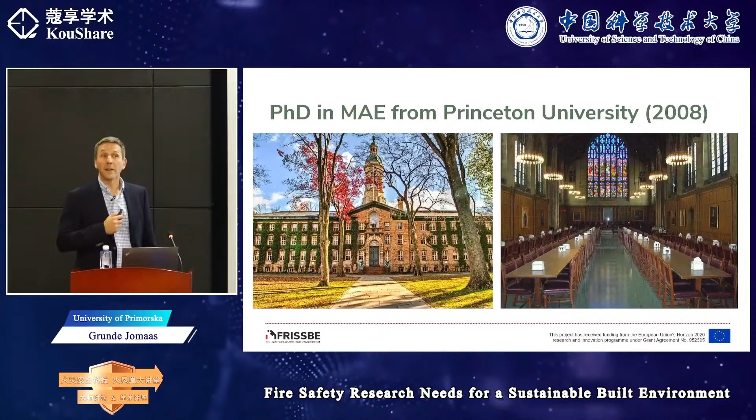So I studied in the United States at the University of Maryland, as he said. Did a PhD in mechanical and aerospace engineering from Princeton University with Professor C.K. Law as my supervisor. At Maryland, I worked for José Torero in the laboratory. Then I did a postdoc at École Centrale in Paris with Sébastien Candel on flame dynamics, combustion instabilities.

I wasn't there very long because I got a faculty position at DTU in Copenhagen, where I was for 7 years. With a short sabbatical, I went to University of Queensland for 8 months. And then I was a professor at the University of Edinburgh in 2016. And now, since 2021, I've been the ERA chair for the FRISSBE project.

And just to give you a little bit of context, the FRISSBE project is not a research project. It is a capacity building and widening project. So the goal is to collaborate, to enhance the skills of people, with a focus not on photovoltaics, not on mass timber, not on a specific topic, but in general to create people to be better scientists, to be better at applying for funding, carrying out research, writing papers, disseminating. So I'm leading the team there.

So as you can see, for the project, it's a 5-year project. And I started just at the end of 2021, and they will run until 2026. And it's almost like what they call seed venture capital. So the goal is that the European Union gave money for us then to be self-sustained afterwards. So we build up a group, and then with 5 years of funding, we should be able to create our own funding and our own opportunities.

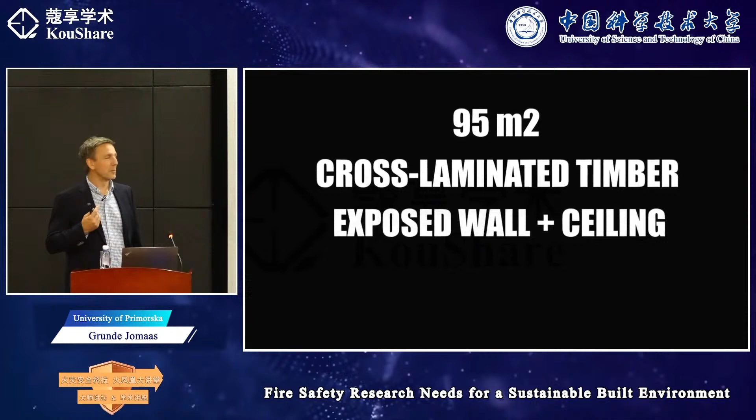And then, let me see here with the sound. So that led to a ban of combustible materials, but now because of sustainability drivers, let me see if it's too loud.

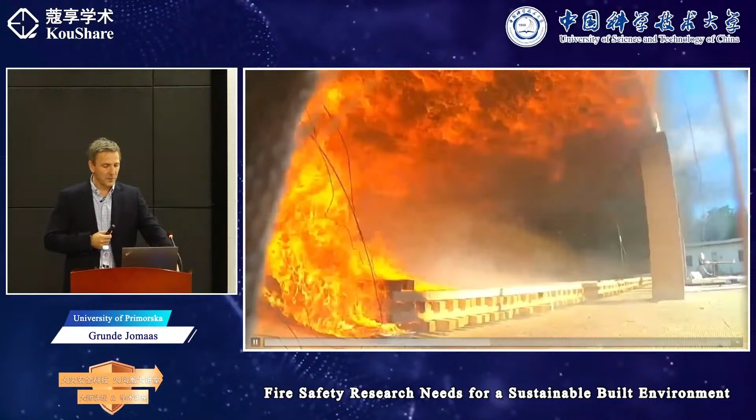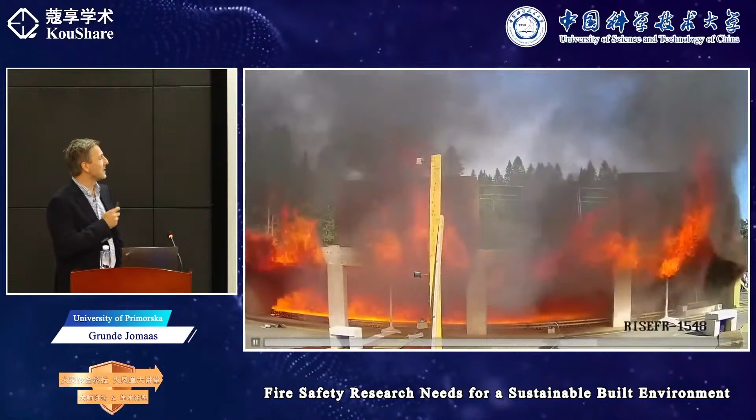Fire, mass timber is becoming very much used again. This is from experiments done in Trondheim at the Rise Fire Research Laboratory, where a PhD student was doing this large test. The room is almost 20 meters. When they did a fuel load on both the floor level and the ceiling level, with walls fully compartmentalized with wood, they started the fire on one end, and it took about 5 seconds to flash over and travel the 20 meters. This is, of course, very difficult for firefighters, and different from what we expect in a compartment fire.

So basically, if we start with a big fire in London, we created new laws, new regulations for fire safety, and we learned many things over now 350 years. But then in the 60s came requirements and demands for energy efficiency—there was a fuel crisis. So then new materials, plastic materials, entered buildings, and we had a need for new regulations.

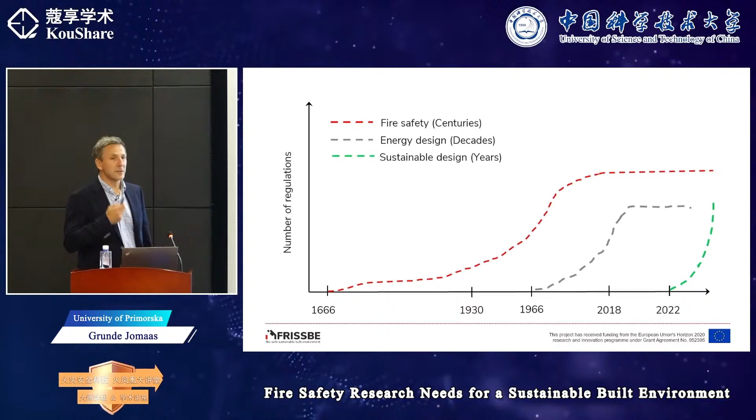And then, of course, we had the big fire in 2017 related to Grenfell, which came as a result of this energy renovation push. And now, with sustainability, the drivers are so quick that we have to address things on a yearly basis. We did things on centuries for fire safety, then tens of years for energy renovation, and now with sustainability things are going so fast. Fire safety regulation may take 5 to 10 years to implement, whereas the problems are introduced on a yearly level or even faster. So that creates a big problem.

If we want to be sustainable, a definition from 1987 from former Prime Minister of Norway Gro Harlem Brundtland, in a commission for the United Nations, states that sustainability consists of fulfilling the needs of current generations without compromising the needs of future generations, while ensuring balance between economic growth, environmental care, and social well-being. So it's not just one aspect you have to look at—you have to look at three aspects.

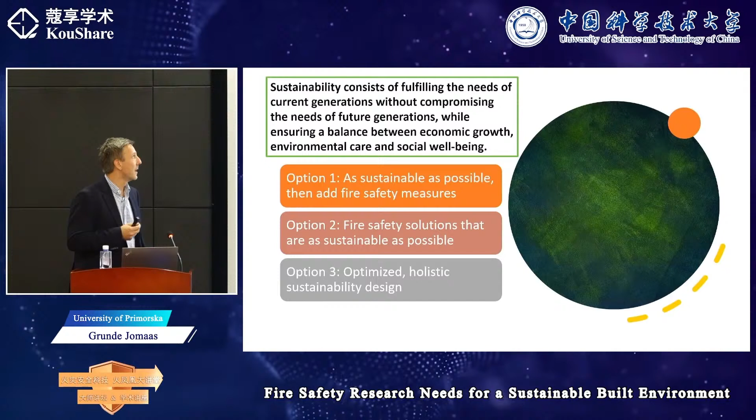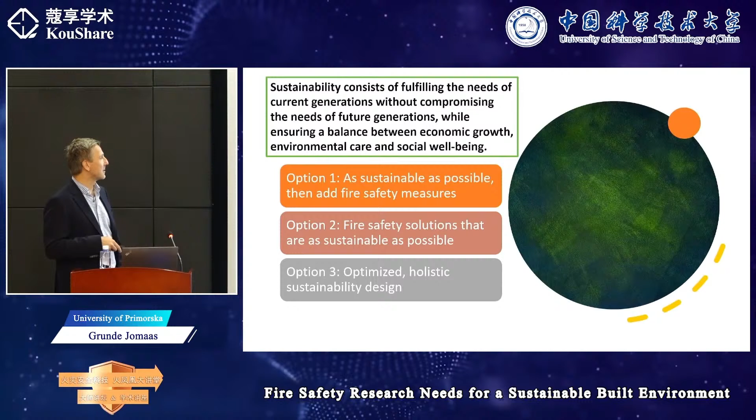When it comes to fire safety, you could think there are maybe three options. One is to build a building as sustainable as possible and then add fire safety measures, which is actually often what is done because the sustainability drivers are so strong on a political level. Option two is fire safety solutions that are as sustainable as possible—we see this now with water mist versus sprinklers, which is more sustainable, which should be chosen for a given building. But in my view, the ideal goal is an optimized holistic sustainability design, and this requires research.

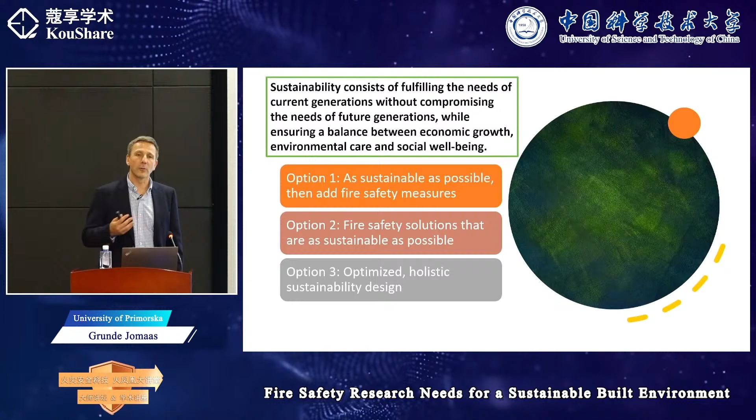We need to understand the many complex factors that go together to build this combined approach. Just to remind you, this happens in many places—this was in Valencia last year. People think we had Grenfell and then we learn and we know, but then you had a fire in Valencia where, following the timeline, in just about half an hour it not only spread to the whole building but also ignited a neighboring building in that short time frame. So the problems are here, they're here now, and they're everywhere.

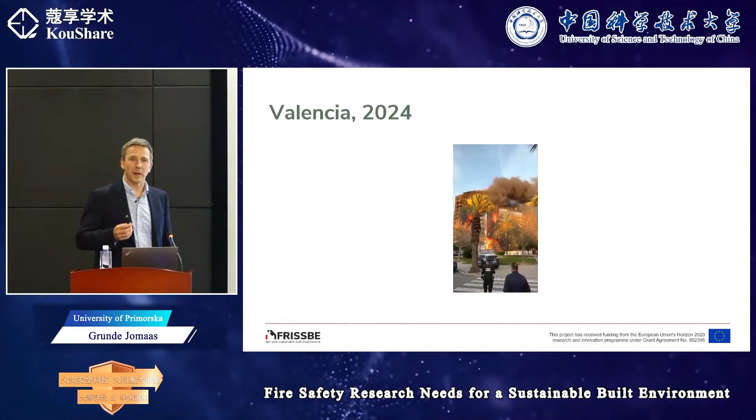So basically, fire safety research has become essential for Europe, for the world, to reach the goals set forward with respect to energy, climate, transport, and sustainability. Innovation leads to risk—this is normal. But at some point this risk becomes too big, and intervention is needed. And this is now. So we need to ensure that innovative solutions are safe. Performance-based design is a necessity because prescriptive solutions are not created with sustainability in mind.

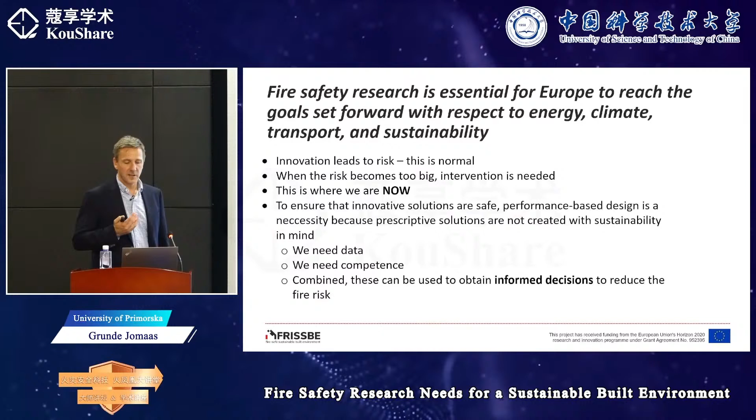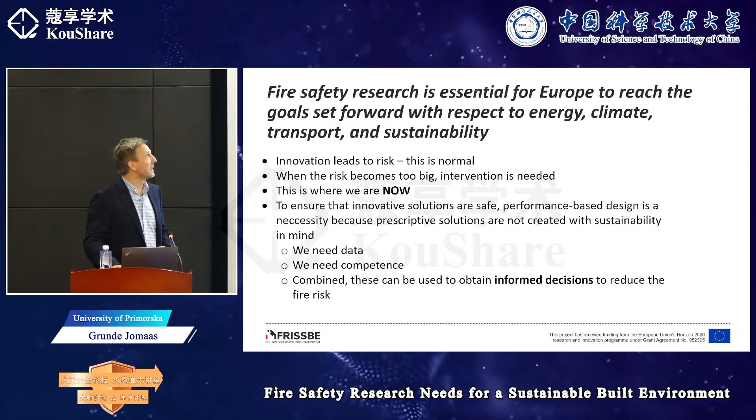So we need data, we need competence, and we need to combine them to make informed decisions to reduce fire risk. So informed decisions based on true facts and research. And to show that this is throughout, I borrowed this slide with permission from Wojciech. So I kept his ITB logo. He gave this talk just a few weeks ago in Zurich.

And he shows that if you look at the built environment, the fire safety research needs are everywhere. Whether it's energy generation, distribution, and storage, 3D printing of buildings, ventilated and green facade systems, electromobility, infrastructure, future mass transit, mass timber, and decarbonization. It's in the entire built environment that we have new innovative solutions being brought forward at a pace that it's difficult for safety to be included at the same time.

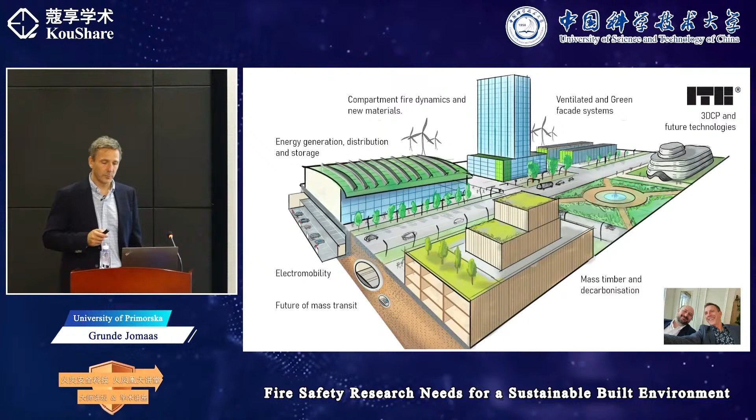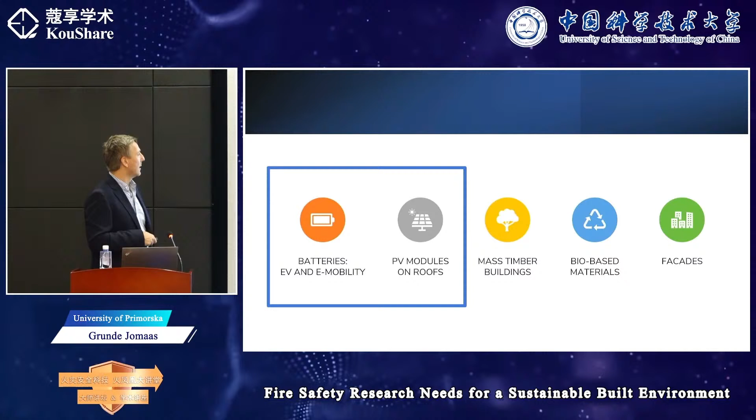So I could have talked about many other things, mass timber, bio-based materials and facades as well. But to go a little more in depth, I focus here on batteries in terms of EV and e-mobility, and also on PV modules on roofs. For both of them, it's kind of similar. You want to know about the ignition, the fire dynamics, how it interacts with the structure or the compartmentation, and you need to take into account the firefighting. And of course, from a sustainability point of view, you need to know what the environmental impact is of all of this.

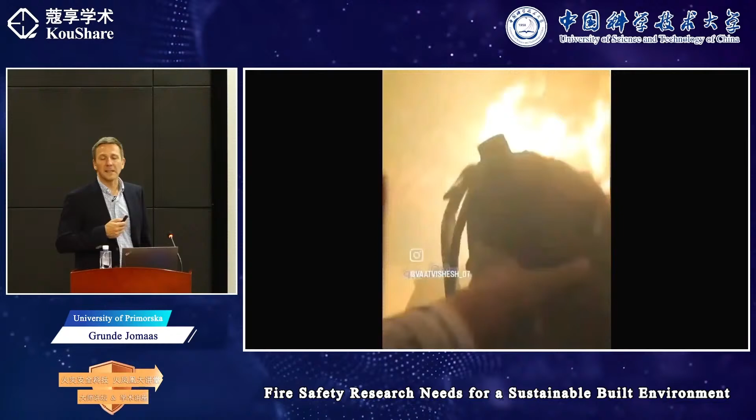And in terms of batteries and e-mobility, the problem is bigger on the smaller level than it is on electric vehicles, because you also have proximity to people. The speed with which you reach a 1 megawatt fire, say a flashover, is very fast, and it's very unpredictable. Cooking fires are one of the main causes of fire, but that happens when somebody is doing something, though people can fall asleep and so on. But battery fires very often happen when people are sleeping, not expecting it. The device is not technically seen to be active.

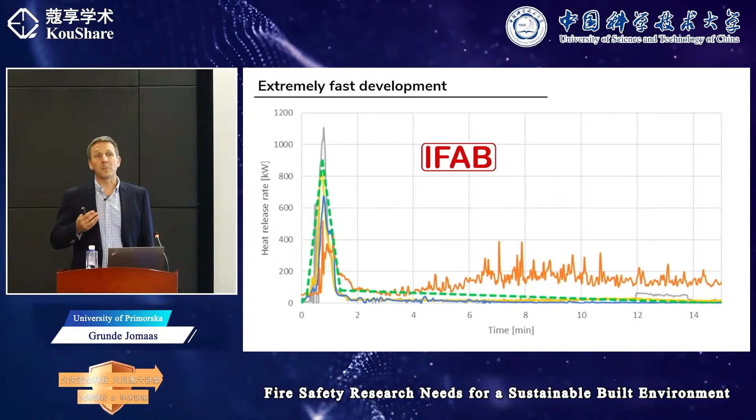So if you look at some of the research that's been done for batteries, like an e-scooter, you can see that it can reach 1 megawatt in less than a minute. And from classic fire science, an ultra-fast fire takes 75 seconds to reach 1 megawatt. That's based on a liquid pool, an arson scenario. So these fires reach that size even faster than a liquid fuel.

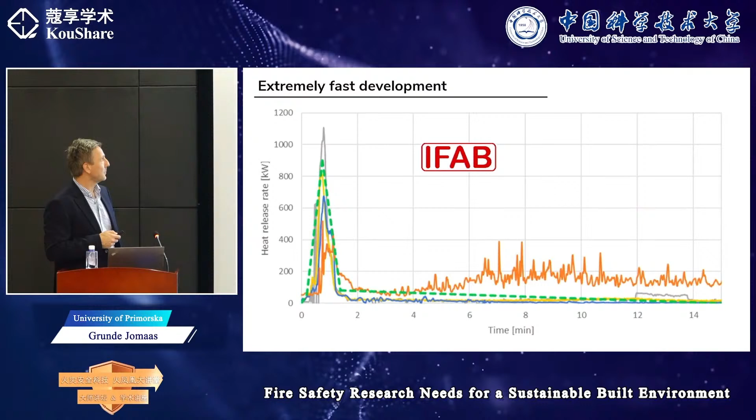But not only that, there's also very fast development of, for example, hydrogen fluoride. These are some tests we did in our laboratory, where you could get values that are 10 times lethal in a very, very short time. And I think this was the case in the battery factory fire in Korea, where 23 people lost their lives. They went to fight the fire, thought they were going to approach it, and then because of the toxicity, succumbed to the fire. So there's also a need for education, for people to know that they need to just leave instead of trying to fight the fires.

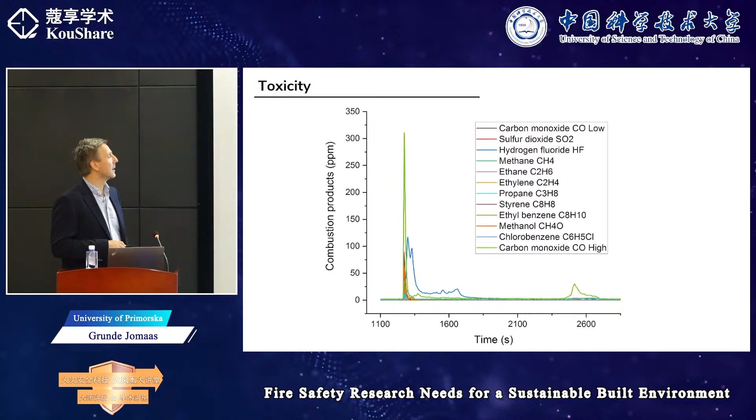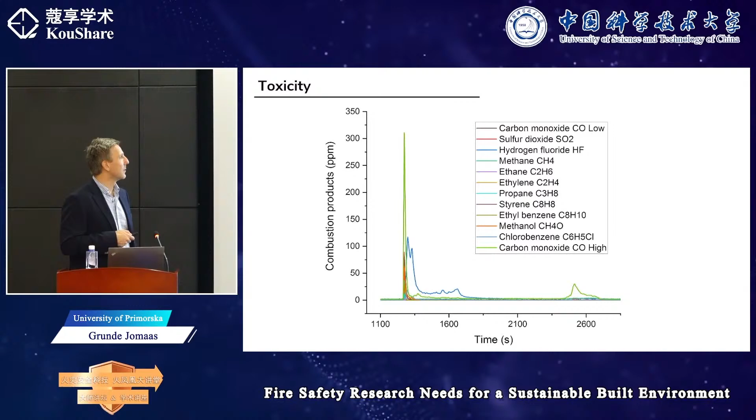In New York and in Vancouver, it was the leading cause of death in the past years. Now they've made several regulations to improve that, but it's a very important problem. So in terms of sustainability, we often have a very nice utopia. But no matter how good a utopia you create, if your dystopia is bad enough, it does not matter.

So this is from a bus fire in Paris, an electric bus. And because of this, and the same in London, the fires they experienced led to a ban. So you do all the development, then you have one fire, and you end up with a ban, and all the hundreds of buses of the electric fleet are just put in a parking lot. And that's not an informed decision. That's what they refer to as a knee-jerk reaction, where people say, oh, we don't know what to do with it, so we just put it away. We don't want to deal with it. We don't allow it. And that's not a good solution either.

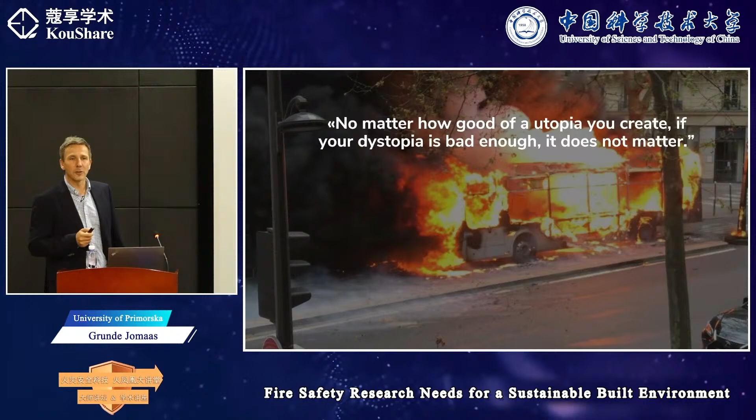So in terms of car parks, I think, for electric vehicles, the most interesting part will obviously be car parks, because with a car fire on the street, most often people are able to get out. If it's involved in a crash, it could be different. But in general, if a car is in the open, people can get out of the vehicle and it can burn out. But in car parks, we've seen over the last few years, many car parks have collapsed.

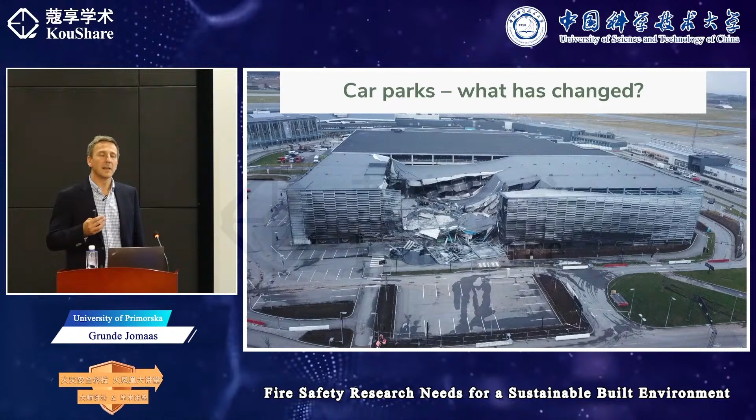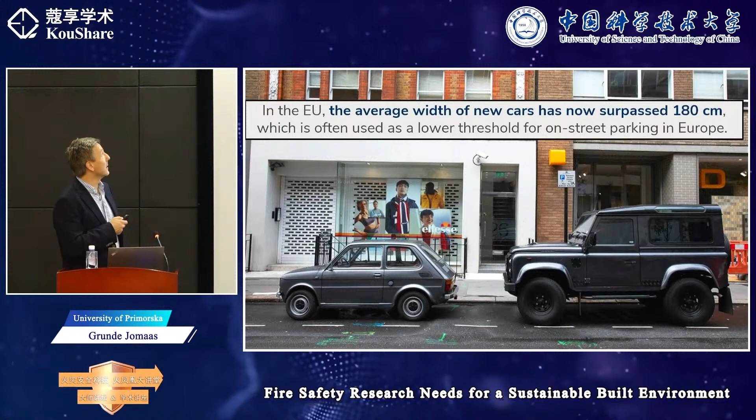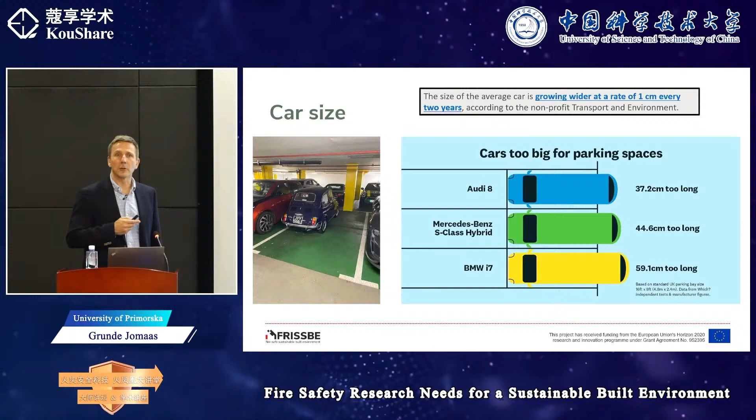And this is a combination of wanting to build leaner buildings, and it's not related to EVs. The biggest problem is actually the size of the cars. You can see in the EU, the average width of new cars has now surpassed 180 centimeters, which is often used as a lower threshold for on-street parking in Europe. And if you put it in a parking garage that was designed for something like this, you see that the other cars fill it, and the cars are much closer, which leads to a bigger fire.

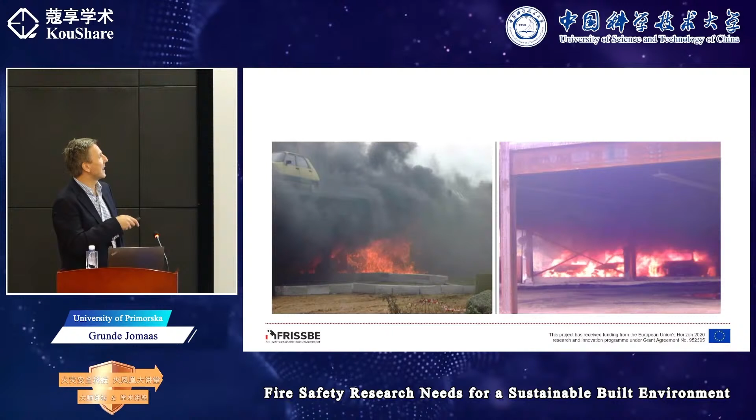This is research done in Europe in the 90s, and this was what they perceived as an open car park, and they had 3 cars. It was always assumed that you would only have 3 cars burning as the fire scenario. That's the design fire. And you can see here it's open, it's right on the edge. If you look at the fire, a lot of the energy is going outside of the car park, not staying inside.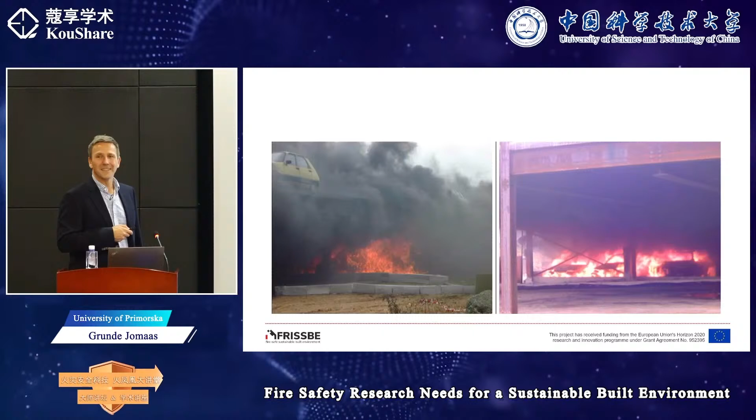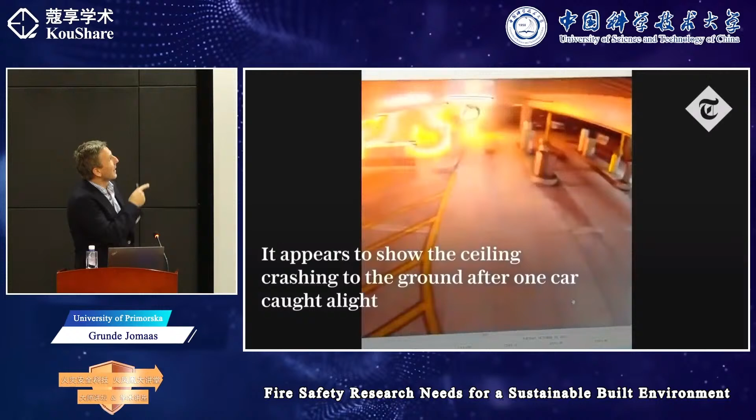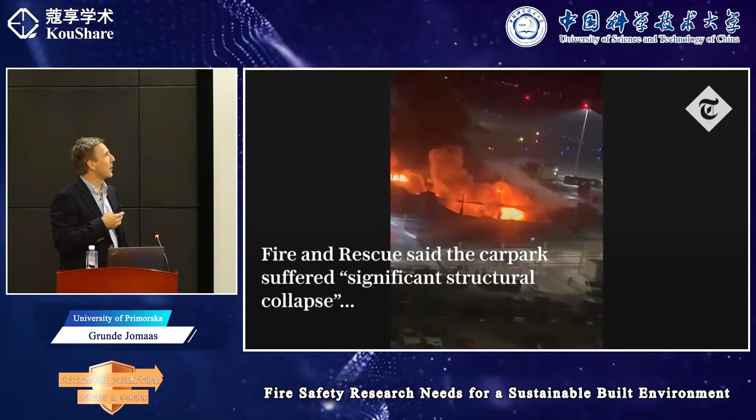And then we end up with something like this, which was Luton Airport outside of London, where you can see a fire was so big that the deck went. And if you think from a firefighter perspective, with the car coming through the deck, it may look like they could enter the building, but they had to fight the fire from the outside. And the aftermath looked like this.

This was starting in a car. It was not an EV. And the driver drove into the car park, and he didn't realize. There were CCTV cameras showing that there was smoke coming from his engine. And he was in a rush, so he was driving, and he parked. He didn't even park next to other cars. He parked actually in the driving lane. And he tried to use 2 fire extinguishers to extinguish it.

Didn't manage. And even in a place where people can call the fire service with cell phones, it brought down the entire structure. The fire service could not get in. By the time the fire service got in, you could see from the body cams of the firefighters walking in the stairwells that there was cracking in the walls already. So they withdrew, and rightly so, because it led to a collapse and hundreds, if not 1,000 cars being involved.

What is particular for EVs though is that you have the vapor cloud explosion, and you have an ignition with a jet-like flame underneath, which will lead to the fire spreading to other cars. Many people are saying that if the gas tank were to burn, it would also lead to that. But the gas tank is not as often involved in a fire as the battery is in an electric vehicle. So there are new challenges, but the main part is that when cars are parked very close by, they can ignite each other. And of course, cars these days are predominantly plastic outside instead of metal.

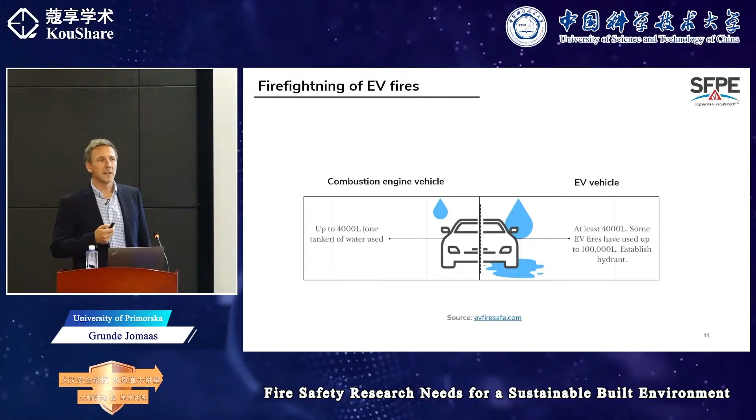So the key here is that there's some new challenges. They're not necessarily larger, but they're different. So we need to understand them, we need to research them, we need to inform the firefighters, we need to work on the technology and get different stakeholders involved. And then, of course, you have things like this.

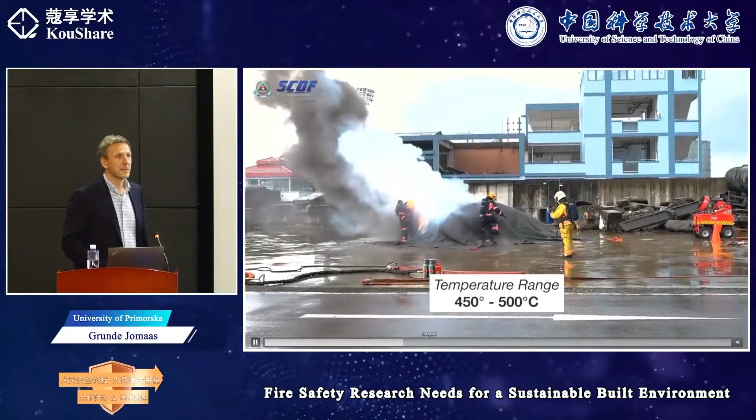So some of the research related to electric fires is with fire blankets. And just recently, the Fire Safety Research Institute from UL issued that firefighters need to be very careful when using a fire blanket, because you can accumulate gases and you can have an explosion afterwards. And I know from tests like this, that's sort of a promotional video, that lifting of the blanket will introduce oxygen and may cause a backdraft.

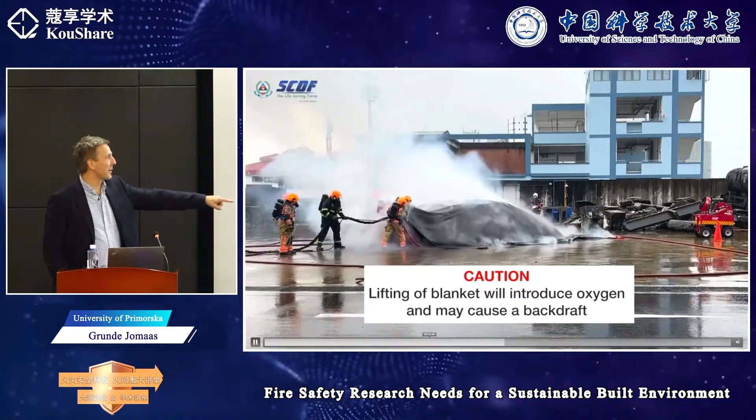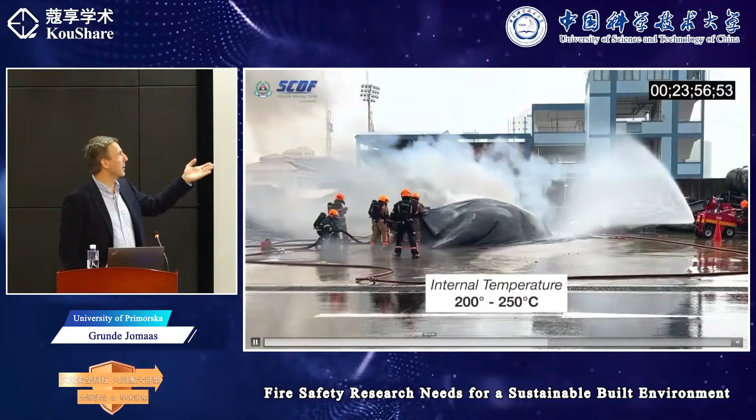So they say they've included this. It's not shown in the video, but obviously they must have done some experiments where this actually happened. They don't want to show it, but they probably saw in some experiments that they did in Singapore the same as UL saw in their research.

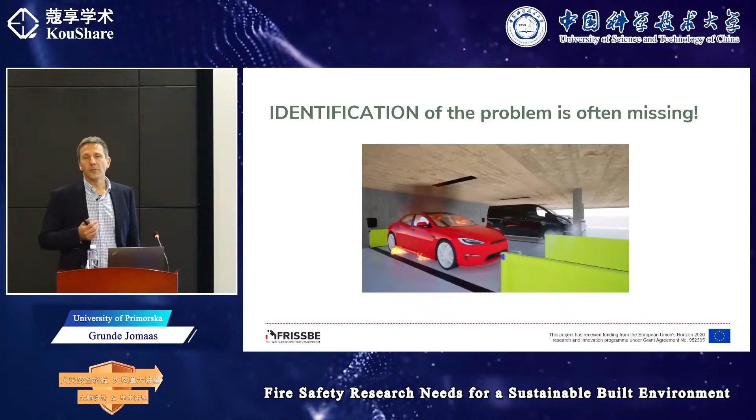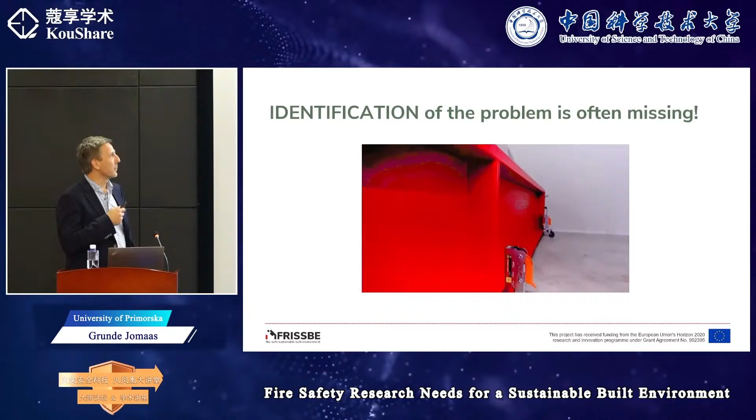And the challenge with this is that often the identification of the problem is missing. So when there's many new problems, there will also be many of what is referred to as a solution looking for a problem. People haven't understood the problem, because, to me at least, the challenge with this is, yes, it may work, you can fill it up and you can fill the car, but how are you going to have that for every car in the parking garage?

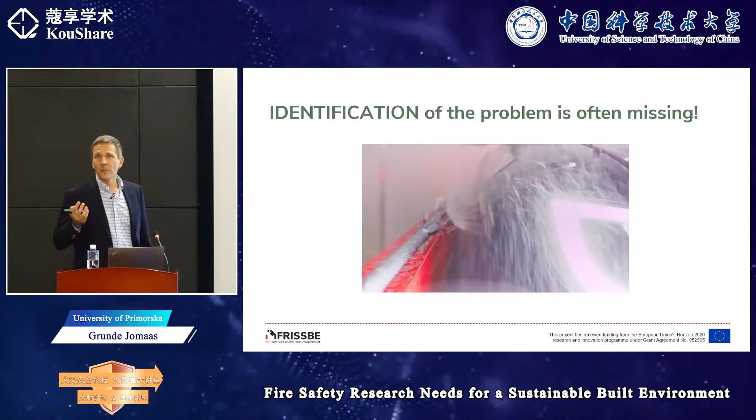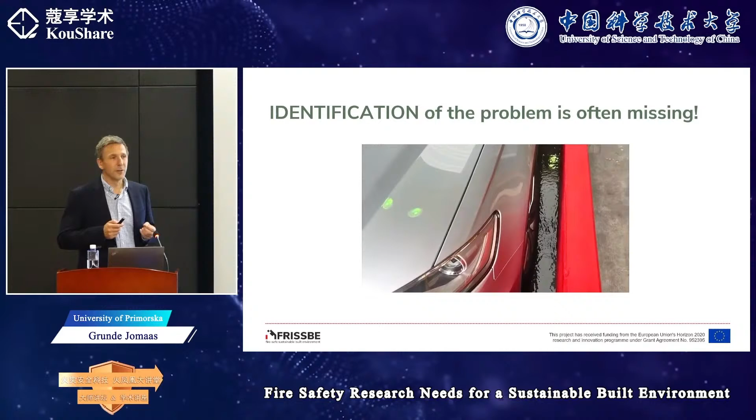Or some people say, oh, we can move it to the car that's burning. But keep in mind that in London, in Stavanger, in Liverpool, the problem was the firefighters couldn't get to the fire even with the hose. So how are they going to get to the fire with this? If they could get there with a hose, they would do so. But in those fires, they didn't get there in time. So we need a better solution.

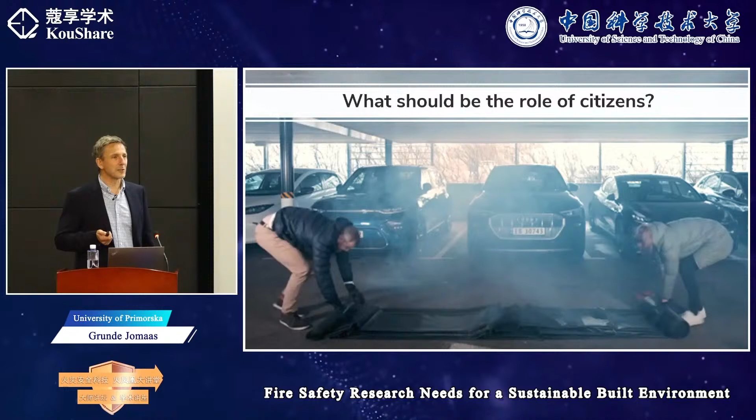And then also with fire blankets, people say, oh, well, then the people can do this. But should we expect the regular citizen to be the firefighters? I don't think so, also having talked about the toxicity and the problems that we can have. It's important to acknowledge that it's better to leave it for the firefighters, but also to come up with solutions that don't have to involve citizens and rather keep them safe.

So the second part that I'm going to talk about is photovoltaics. In Europe, they have something called REPowerEU as part of the Energy Performance of Buildings Directive, and by 2030 there's going to be more or less PV on all buildings on the roofs. And what I like to emphasize is that all buildings means hospitals, it means nursing homes, it means museums,

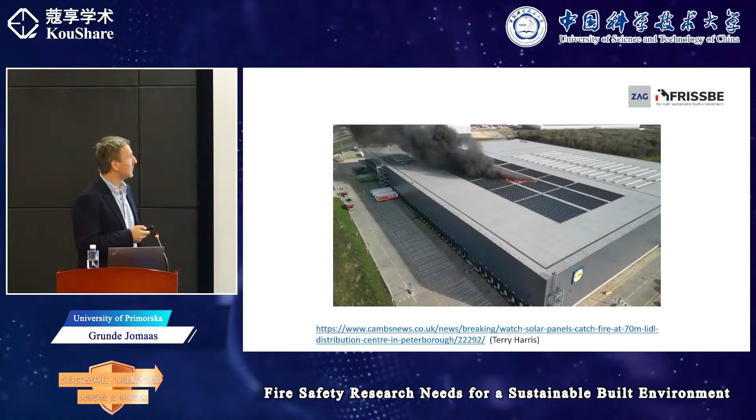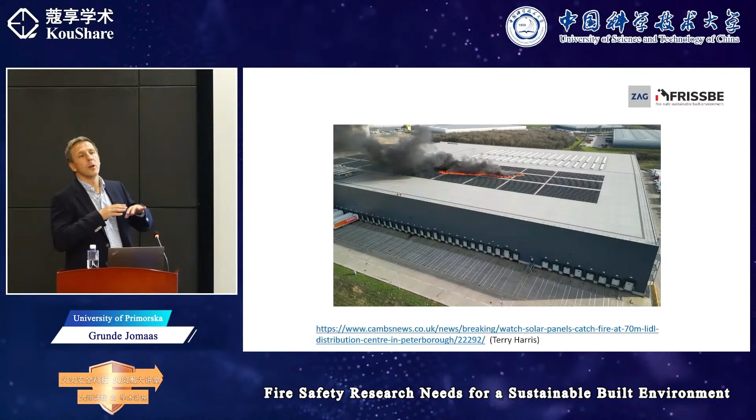However, I didn't show this, but this was a new build, and it managed to survive the fire. Other buildings have not been as well protected, so you need to know the solution both for separation distances, but also for what kind of materials you're going to use.

So at ZAG we created a fire safety guideline for building applied photovoltaic systems on flat roofs. And we're working now with the group here at USTC to make also a translation into Chinese, because we find that it's important to share this sort of basic knowledge information with everyone. It's not an installation guide, it's practical, common sense things that people should be aware of.

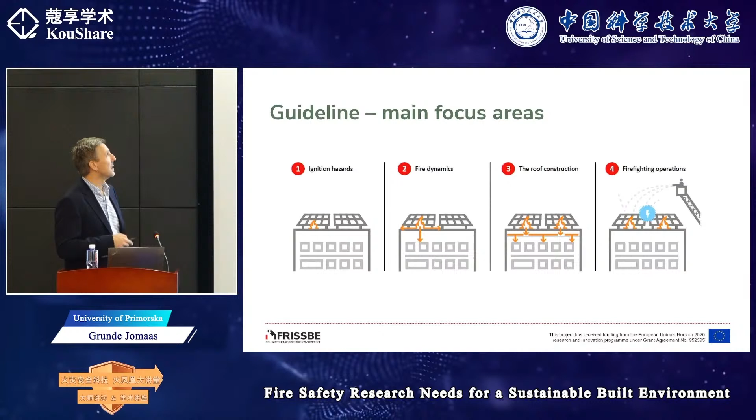And similar, as I showed with the batteries, we look at the ignitions, fire dynamics, the roof construction, and then firefighting operations. And the goal is to avoid large consequences of a PV fire on roof, and that could be by minimizing ignition frequency and power, or minimize the fire spread rate and extent.

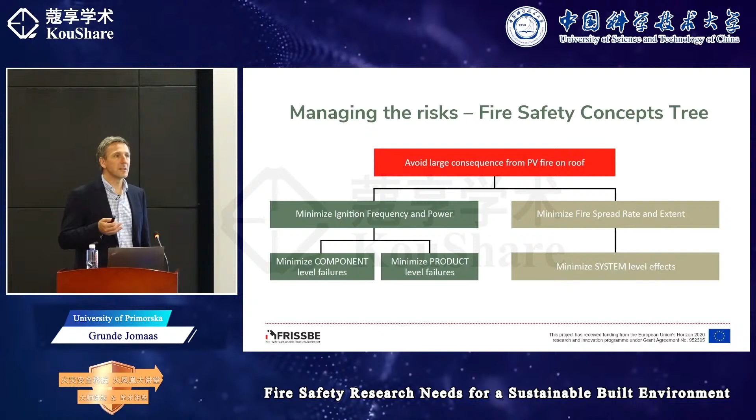So this is component and product level, and there's a lot of codes and regulations and tests for components, for the cables, for the photovoltaic panel itself, but very little or nothing on the system when you put it on the roof, which is the real problem. Because we test the roof and we approve the roof without photovoltaics, and then when we put the photovoltaics on the roof, it changes the fire dynamics, and the fire can spread, it becomes bigger.

In terms of the fire, we can look at two main scenarios. It could be a fire that spreads on the roof, and then we want to protect it from coming to the building. So the fire dynamics, but also looking at the roof construction, what we need to protect it. And there can be also problems with fires starting inside the building involving photovoltaics.

This is from a fire in Norway. It led to initial 20 million euros loss, but now it's more than double of that, because they needed to change all of their distribution logistics for all of Norway, Sweden, Denmark, based on this fire. This fire started in a truck charging inside the building.

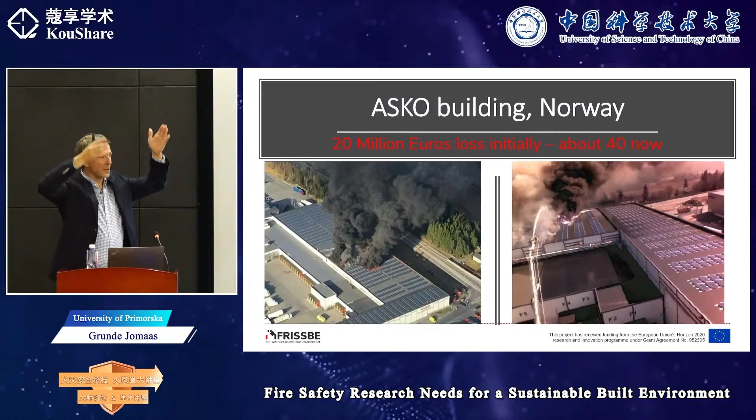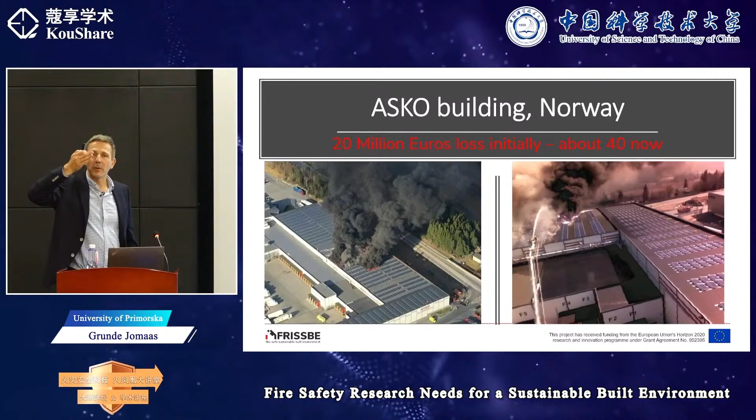It went up to the roof, and nobody thought that the fire would spread on the roof, because if you have a regular roof without photovoltaics, the energy would just go up and it would go outside. But with the photovoltaics, now it spread laterally, and it spread so that it involved two sections. They didn't have a parapet, they didn't have the fire break to go above the roof level. So they ended up with a very, very big fire, 9,000 square meter damage.

They needed to use wildfire type of helicopters with big pods of water to extinguish it. So there were also concerns of the environmental damage with the leakage of contaminated water to streams and nearby areas.

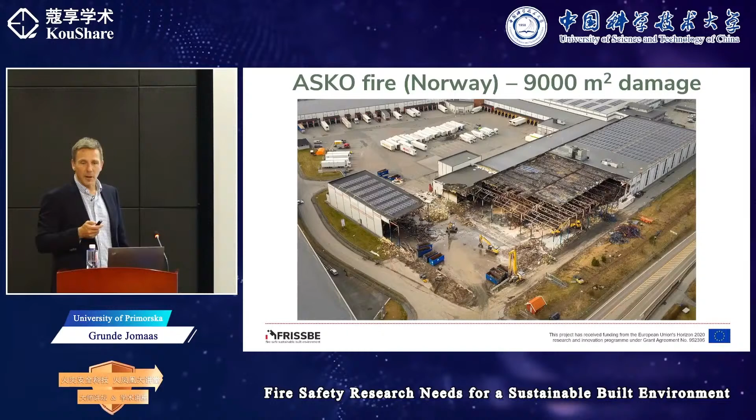And is it a problem? People often ask, and I ask also Yu Wang and some of the students when it comes to BIPV, because for BAPV, we have some numbers that there are maybe expected something like 29 fires per gigawatt. For the conference in Slovenia, my PhD student looked in Italy and Slovenia very closely, and the numbers are pretty much the same. In Slovenia, actually almost 40 for the last 2 years. So it does happen quite regularly.

Of course, not all of these fires become big, but that's what we want. It's okay, we can't prevent somebody from dropping a match or some electrical fault to happen, but we want it not to necessarily make it to the news. We don't need a big fire.

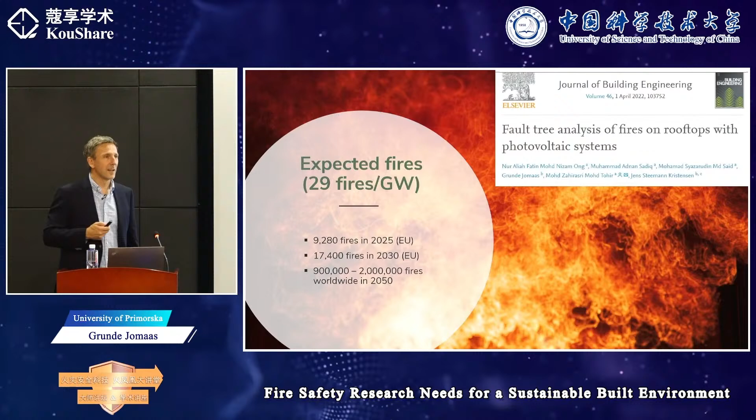So the problem is that it changes the fire dynamics, and this is some work by a former PhD student, Jens Steemann Kristensen, who's now at DBI in Denmark. Here, there's just a PMMA plate. There's nothing above it. So it burns like this. So take a note, this is 20 minutes. And then it's 50, 80. So it's just regular flame spread.

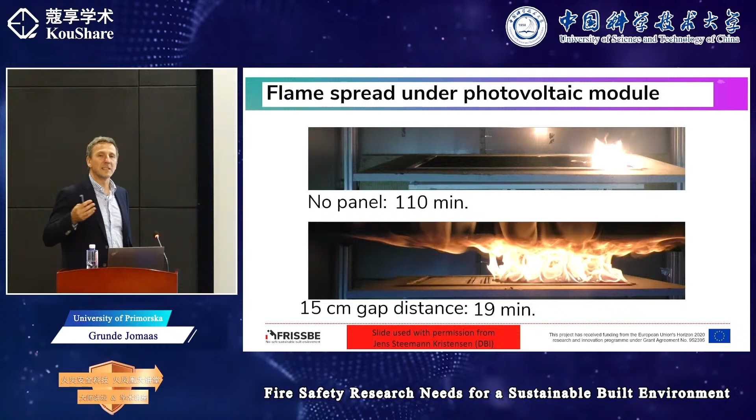But then we put not even a photovoltaic panel on top, just a metal plate. We did also with a photovoltaic, and the results are pretty much the same. And 15 centimeters above it, 10 minutes, and this is 20 minutes. Remember at 20 minutes, the flame was just about this size. Now it's spread, and you can see it consumed all of the materials and a much bigger fire that will then very easily spread to other places.

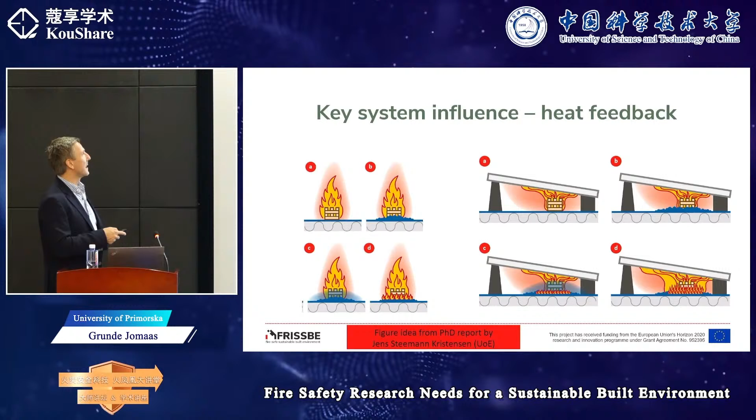So the basic premise for most roof construction is that if you have a fire, it will just burn like this, and you have some flame retardants in the membrane, and you have a type of insulation that has been tested for this type of scenario. But when we put the photovoltaics, we change that and we get the flame spread.

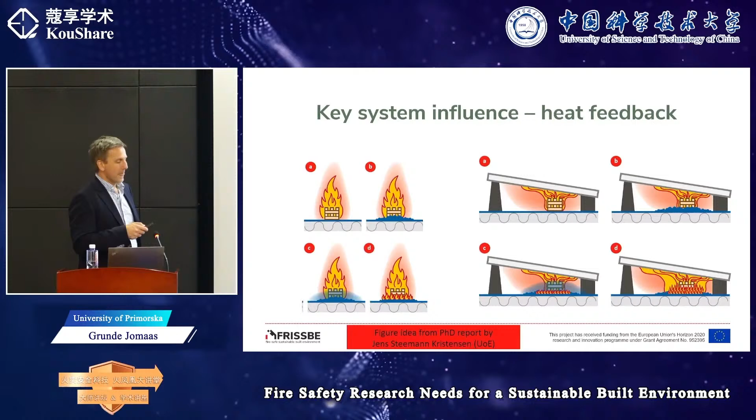So in our lab, we've done quite a lot of testing. We've also done testing with arcing. Because some people say, oh, well, you use a wood crib, why do you use a wood crib? Well, we use a wood crib because it's more repeatable, and it actually just captures the fire at a slightly later stage than the arcing.

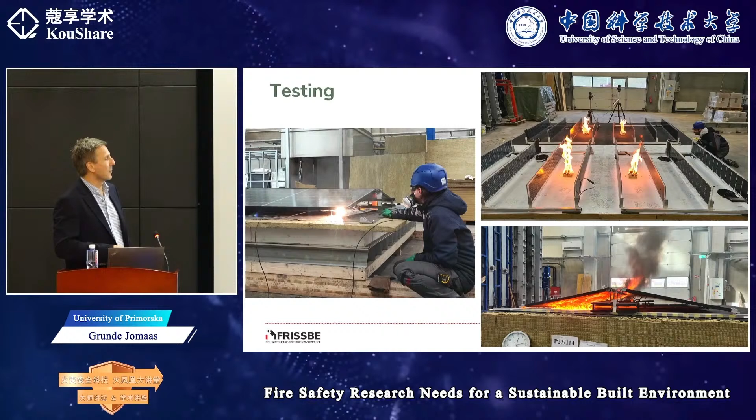We've also done testing just to show the geometry. So if you have upward panels, it's like you don't have any panels, so it doesn't influence the fire spread. But then we have here with panels, and the same crib here leads to a bigger fire that will look maybe something like this after 10-15 minutes.

So this, even with something like 4 panels, this is 4 by 4 meters, so we're burning maybe 10 square meters of roofing membrane, and this could be a 2 to 3 megawatt fire, starting from a 15 kilowatt small wood crib or from arcing.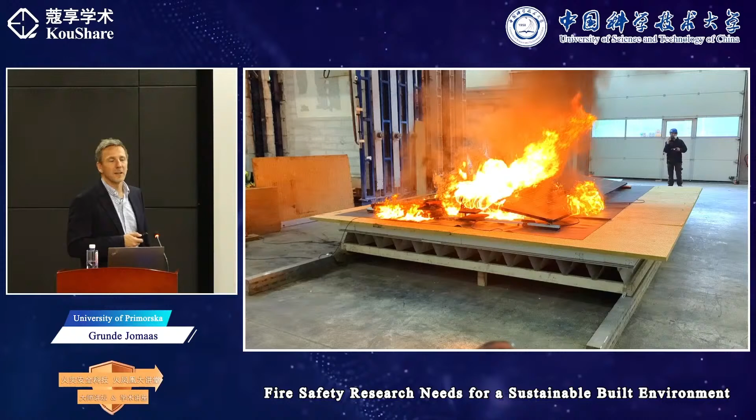So to demonstrate also the different solutions, we showed them simultaneously. This is a roof construction with just bitumen directly on EPS. Here we have a mitigation layer, so here we have a mineral wool between, and this is a build-up with EPS, a bitumen, then a mineral wool, and then bitumen again. And we showed the difference with the 2 different panel configurations.

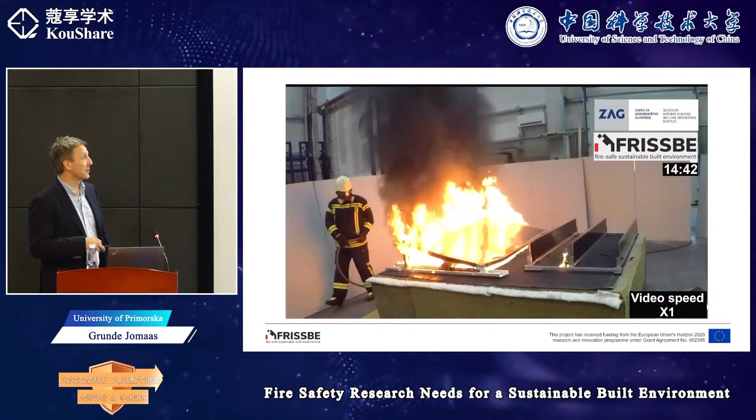So a bit later, you can see that if you have a mitigation layer, the fire will stay local. If you don't have a mitigation layer, it can burn through and engage and burn the combustible insulation. And if you have a photovoltaic like this, it becomes quite a large fire compared to this. This was the same starting point, right? So you can clearly see that the photovoltaic is the one that enhances the flame spread and leads to the bigger consequences.

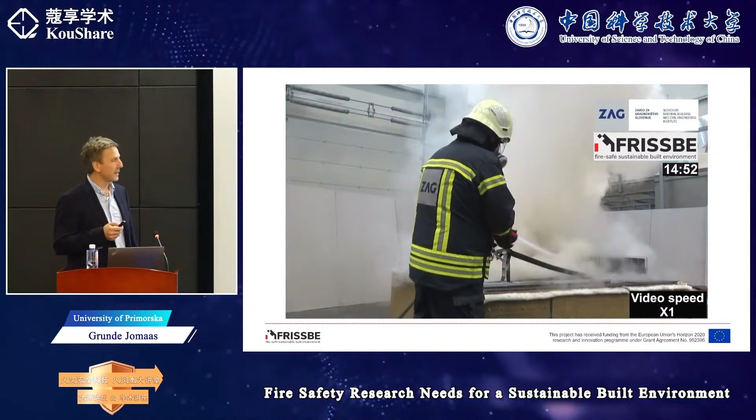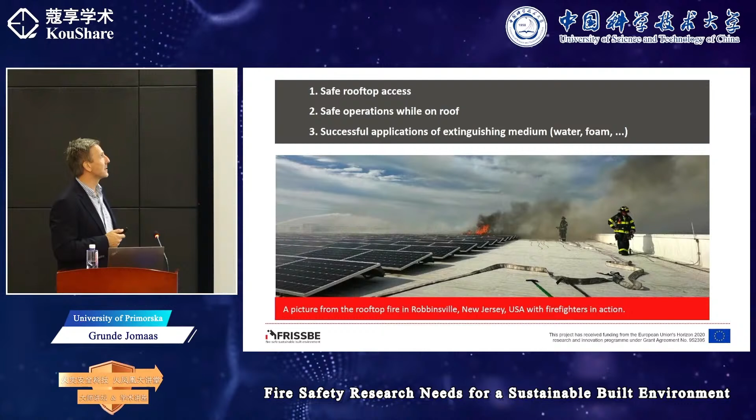In terms of firefighting operations, some of the key things are safe rooftop access. You can sometimes see that people put the photovoltaics all the way to the edge of the building, so then it's impossible for the firefighters to access. There's also certain sizes you want to have so the firefighters can reach across, because they can only spray maybe 40-45 meters. So if you make it just an endless array of photovoltaics, they will not be able to reach where the fire is. And then, of course, you need to take care of their safety and also what is a good fire extinguishing medium. So we've just collected from other people what sizes.

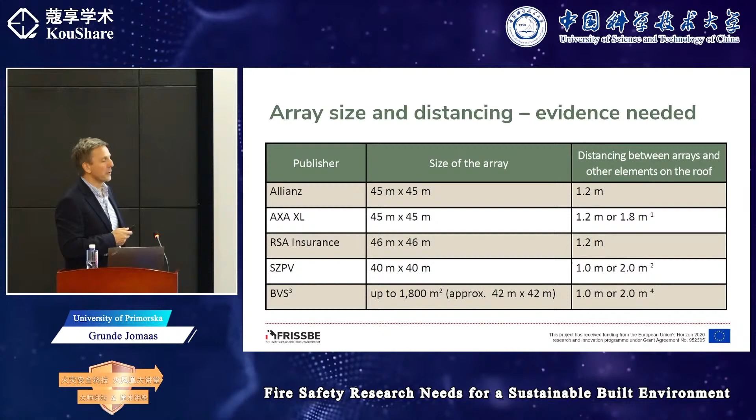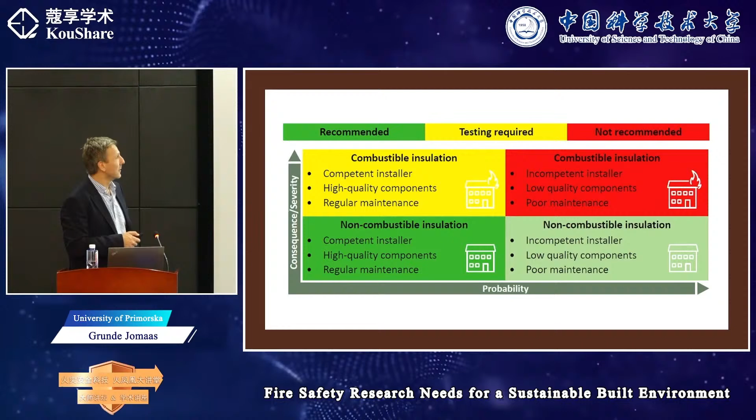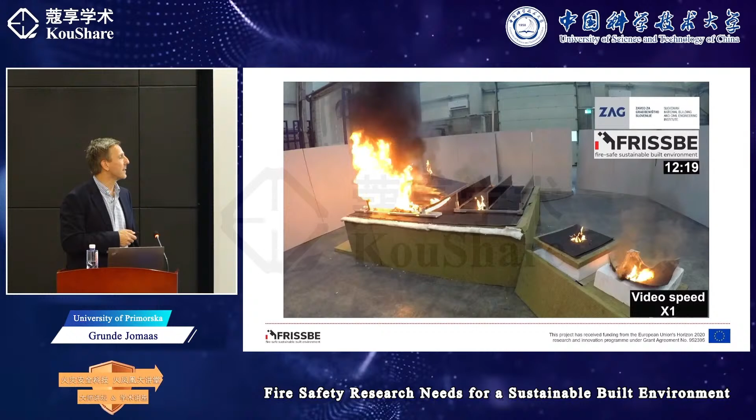And then the challenge for combustible insulation is that combustible insulation is not all the same. That's a wide range. It can be from a very, very flammable material to a thermoset, highly flame retardant material that may have quite good fire performance. We recommend for all solutions that they are tested, but what we refer to in the guideline as combustible insulation is, if I go back, particularly a setup like this with EPS, a very flammable, lightweight insulation material.

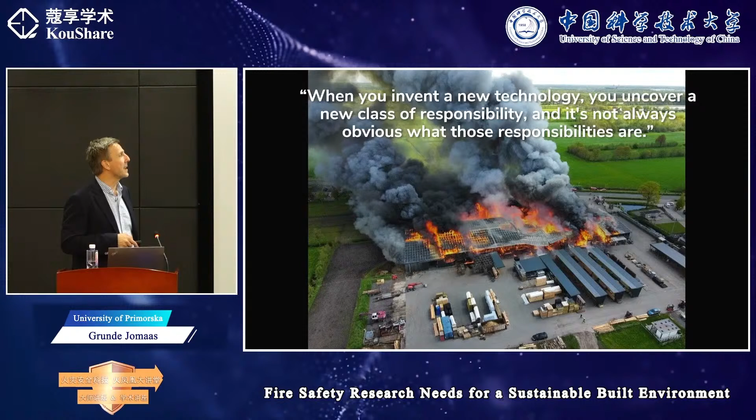So this was not a fire in the photovoltaics as such, but they were involved, they were on the building. And they found in fields as far as 3 kilometers away, where kids were playing, where animals were feeding, pieces of glass that had been transported with the plume from this bigger fire.

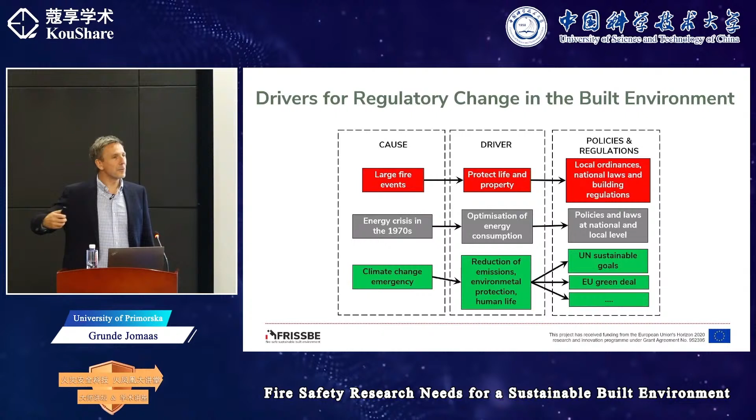So I said a little bit about this before, and it's a bit complex, but we used to work from large fire events and then protect life and property, and then we have rules. But now the goal is climate change. We have an emergency that is not related to the fire, it's a different thing. And those lead to and push very hard on objectives that we need for buildings, but nowhere in here is safety really explicitly addressed. So we used to have safety as the main driver, but now there are other drivers.

It's human well-being, it's social, societal responsibility for the planet, and in the midst of that, we're forgetting that safety should be part of it. People always think that safety is always implicitly included, but it's not.

So basically, I'm not going to go through it in large, but we need to have a combination of fire safety design, energy design, and environmental design, where we look at how this can be optimizing the built environment. I think Ulysses created this figure, but we need interaction between fire safety design and environmental design, between energy design and environmental design, and then fire safety design and energy design. And it needs to include property protection, life safety protection, and so on.

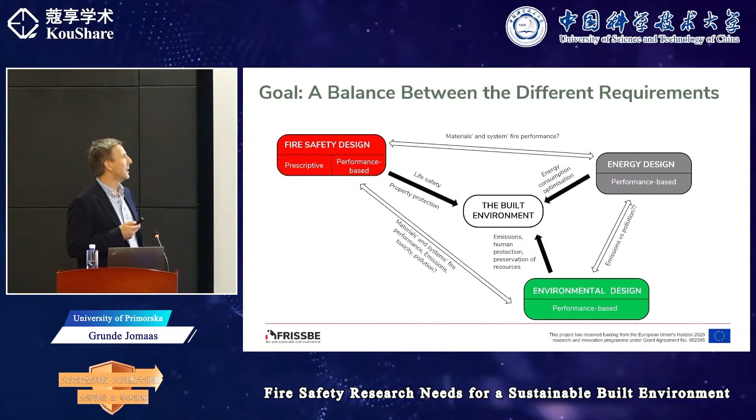And how do we do this? We need a wide stakeholder commitment. We need a concerted effort, so collaboration. And we need to work with each other, not for. I like that UL often say that they do research with firefighters, not for them. Because if you think that you do research for somebody, you don't necessarily understand what their problem is.

So you can give them something and they're like, yeah, thank you, I can't use that for anything. So it's very important to listen to what is the actual problem of the stakeholders, so that you make sure you're not providing a solution looking for a problem, rather than having understood the problem and then providing a solution. So we need education and training, competence requirements, dissemination of knowledge across borders, regulation guidelines, and research.

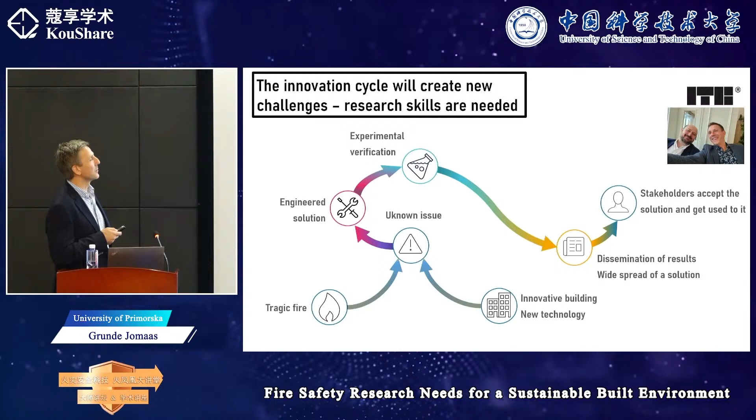And unfortunately, as Wojciech pointed out in another figure, the innovation cycle will create new challenges, so research skills are needed. So we can have a tragic fire, or we can have an innovative new technology leading to an unknown issue. We're trying to engineer the solutions. We do experimental verification, dissemination of results, widespread adoption of a solution, and then stakeholders accept the solution and get used to it. So you see that it's both fire incidents, but also new technology that needs to be included. It used to be maybe just the tragic fire that led to this, but now we also have the innovative technology feeding into the need for research.

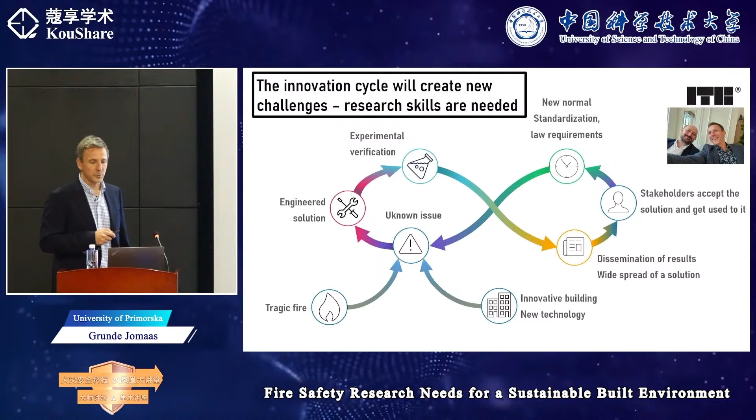And then we will put that in and solve this unknown issue. And in many cases, the knowledge is there.

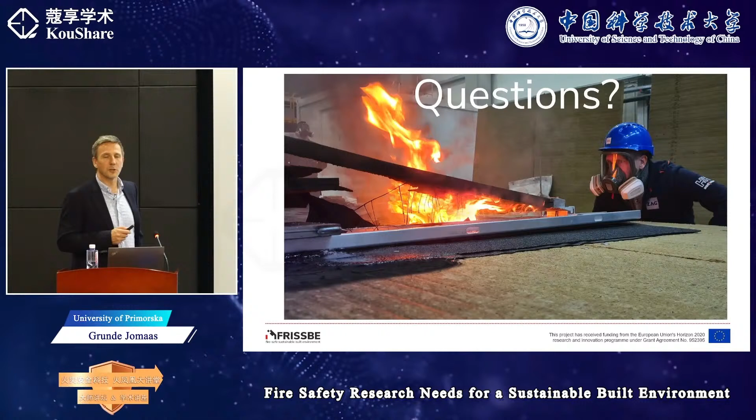So with that, that's me observing some experiments in the lab. I don't do much, that's the students that do it. So I just came and looked at what they had been creating.